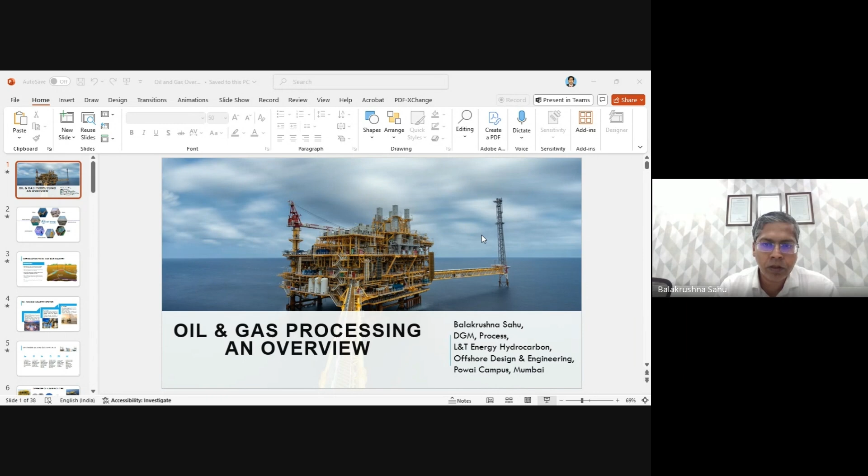Let me share the screen. If I share the entire screen, I will not be visible for any questions, but it is okay. At the end, the participants will ask questions. Is my screen visible? Yes, sir. As explained, I was an alumnus of IGIT Sarang from the 2006 batch. Sorry, sir, you can make it full screen. Yeah, I have done full screen. It's not visible, sir. It is visible, but not full screen. Click on F5 or slideshow. I have done the slideshow. It's visible, but not full screen. Let me share the complete entire screen. Is it visible now? No, sir. Some issue. I am clicking the slideshow. Visible now? Yes, sir, it's good, now it's full screen. You can proceed, sir.

Before going to the presentation, I will tell you where L&T Energy Hydrocarbon works in various aspects. I work in the offshore division. Apart from offshore, we have onshore. Offshore normally deals with making all the facilities inside the sea, in the waters where oil and gas is extracted, and whatever processing is possible is done in platforms located in the sea, then transported to the onshore via pipelines. We have another division called onshore, where after onshore processing, it goes to refineries and petrochemicals.

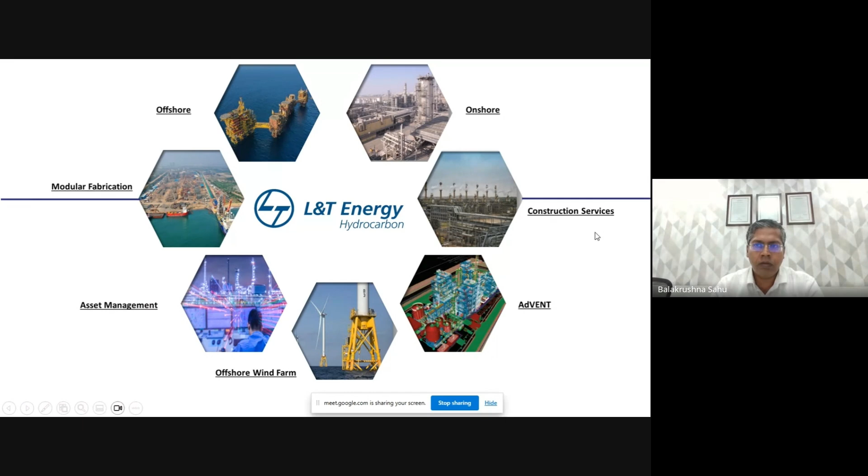Now we'll start the topic - what is oil and gas? Naturally, it is a fossil fuel. Whenever there is decomposition of marine life or fossils, they settle in the seabed. Over time they are buried under sediment and rock. Then there is an increase in pressure and temperature below the rock. Due to that, the organic materials break down, and in that process they form hydrocarbon - that is nothing but your crude oil and gas.

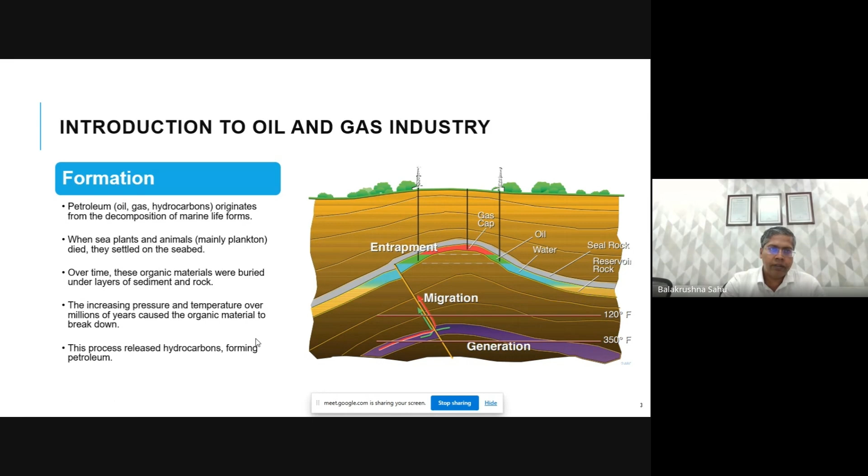So broadly, oil and gas has three sectors. One is upstream, which is exploration, either onshore or offshore, where production happens. Offshore means inside the sea. Onshore means like in Assam and other places in India where it is produced through drilling. So drilling and a little bit of processing happens in the upstream sector.

Then it is transported to the refineries, which is the midstream. There is a fine line between mid and downstream. Downstream, broadly, is the chemicals we produce from the petroleum, and midstream we can call petrol, diesel, and kerosene. So this is the broad categorization, and what I am working in, offshore oil and gas, is related to upstream.

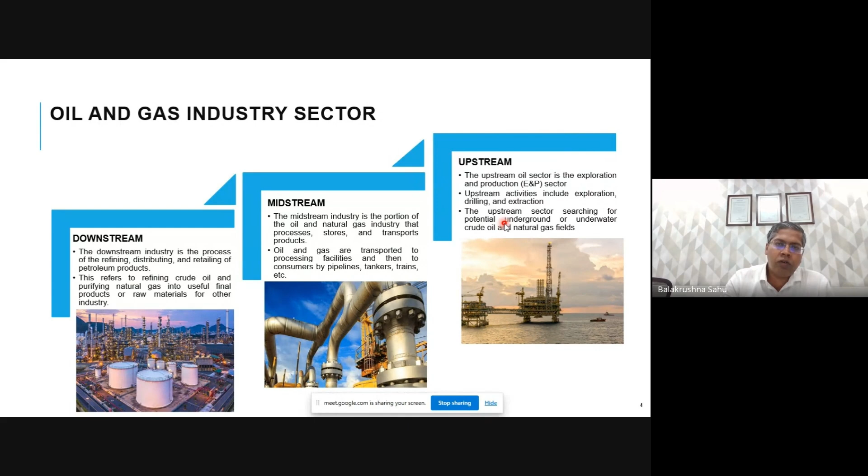So in the upstream oil and gas life cycle, there are 6 phases. First is licensing. Licensing is done every year by NELP and DGH, the Directorate General of Hydrocarbons. They license and give the contract for the fields.

Different bidders will bid. Currently in India, ONGC is the largest E&P player. Apart from that we have Reliance, and slowly Adani has also entered, and Sun Petro. So many small companies are also now entering into this area.

Then there is exploration. Once you get the field, you search for oil and gas, looking for the possibility of an oil and gas deposit, and try to locate it based on reservoir study. That phase is called exploration.

Then appraisal. Appraisal means, based on testing, you know how much gas and oil volume is there, and how much time it will take to produce - what is the life cycle. The maximum life cycle for projects we do is 25 years, so at least 10 to 15 years of life cycle should be there, otherwise there's no point investing a huge amount of money.

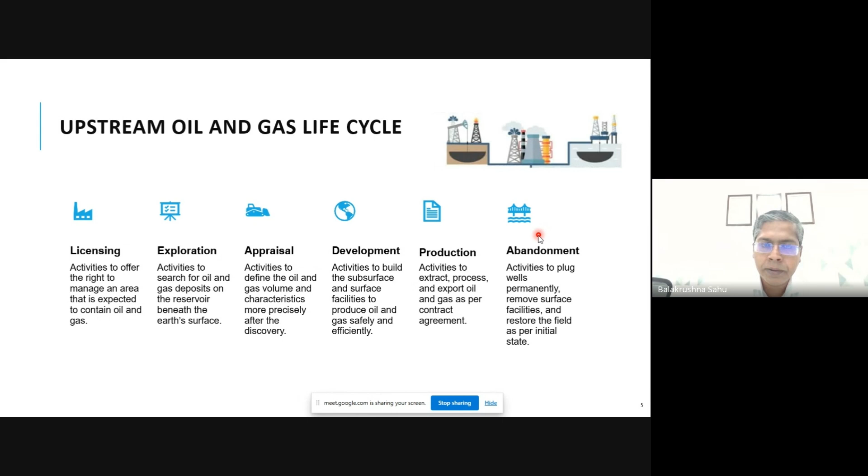So offshore oil and gas facilities - we call them platforms, like plants are known as platforms. We have a wellhead platform, which looks something like this. One platform will house around 10 to 20 wells, minimum around 8, maximum around 20.

So there will be 20 wells, and the risers - after production it will come, this is a collection from the well. This is a wellhead platform. There will not be any processing facilities there, only minimum facilities like a Christmas tree and others to gather it, and they will put a pipeline to transport it to the nearest process platform, or in some cases a riser platform.

These wellhead platforms, based on production, some are oil platforms, some are gas platforms, some are water injection platforms. Whenever the pressure is less in the reservoir, a few of these wellheads will inject water to increase the pressure, so that other wells will produce more.

So that's the wellhead. Then next is the riser. A riser platform is where many lines come from different wellheads and combine at the riser platform. The riser platform concept exists in the Middle East, but in India there are no riser platforms - all lines are different.

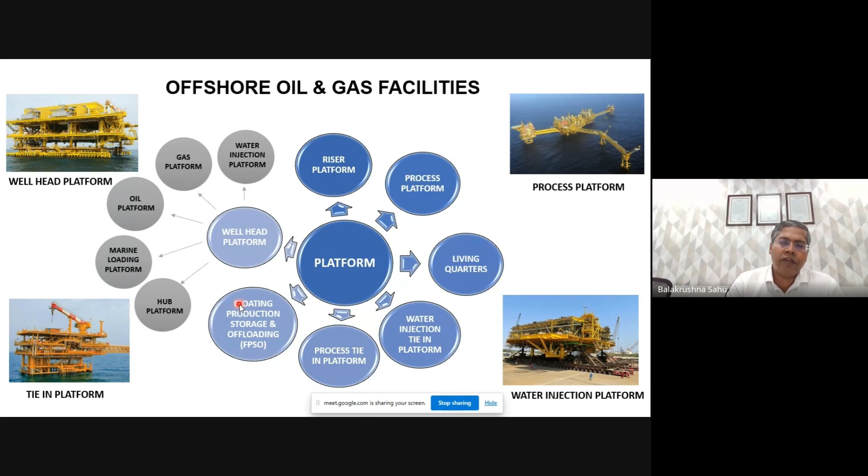Apart from this, there is something called floating production, storage and offloading (FPSO). All these platform concepts are applicable only in shallow waters. When there is deep water, 2 to 3 kilometers depth, you cannot create a platform with legs at that depth. In that case, it is a kind of ship. Once a ship is converted into a platform, it will float. That is called a floating platform.

As explained, there are different types. First, the fixed platform where there is a certain depth, which we call a jacket. This jacket can be as small as a tripod with 3 legs, up to bigger jackets with 10 legs. After that, this is the floating type - if it's the deepest, you cannot do anything else; you have to convert a ship and house the process facility there. The wellhead will be much below, and through there, high tension lines will come up. The flow lines will be floated and buoys will be connected.

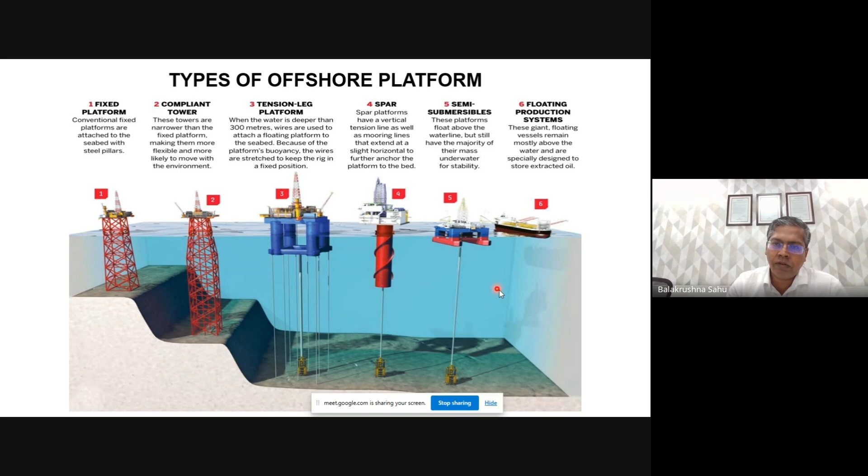At the wellhead, the main facilities available are the Christmas tree. A Christmas tree looks like this, a combination of multiple valves. The role of the Christmas tree: it will have a surface safety valve, a subsurface safety valve, and downstream of this, a choke valve. The surface safety valve is located above the water, and the subsurface safety valve is located on the seabed. Basically, if there is an emergency, these two emergency valves will be located, one at the surface level, one at the bottom level.

This picture shows the onshore version, but what I explained is offshore. Surface safety valve means it's located on the platform, and subsurface is at the seabed. The choke valve is downstream of the Christmas tree, which controls the flow. Let's say reservoir pressure is 500 bar, but we require to produce at only 20 bar - so the pressure reduction happens at the choke valve.

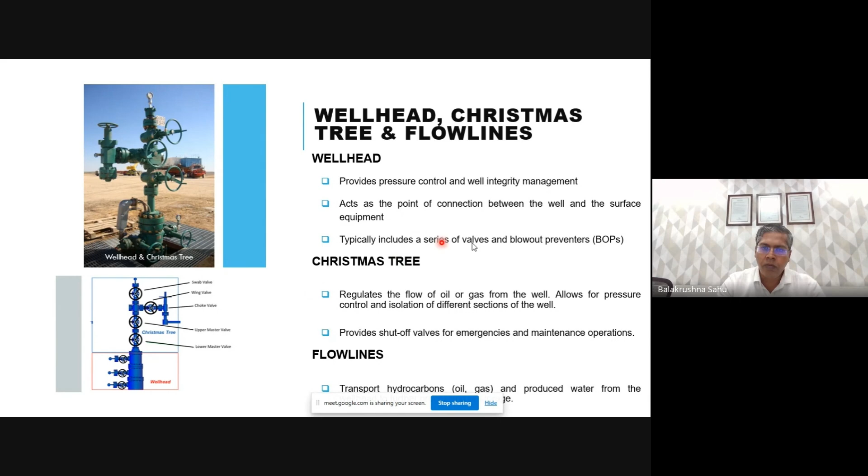In the P&ID, a wellhead platform will have an HCV, which is the choke valve, and an MOV, the motor operated valve. If there are 10 wells, 10 producer lines will come and form a production manifold, and that line will again go down and form a bigger pipeline to transport to the nearest tie-in platform or process platform. There, we also have a testing facility called either a multi-phase flow meter or test manifold, to actually test how much each well is producing, to know the health of each well - whether some well is saturated or some well is producing and not producing.

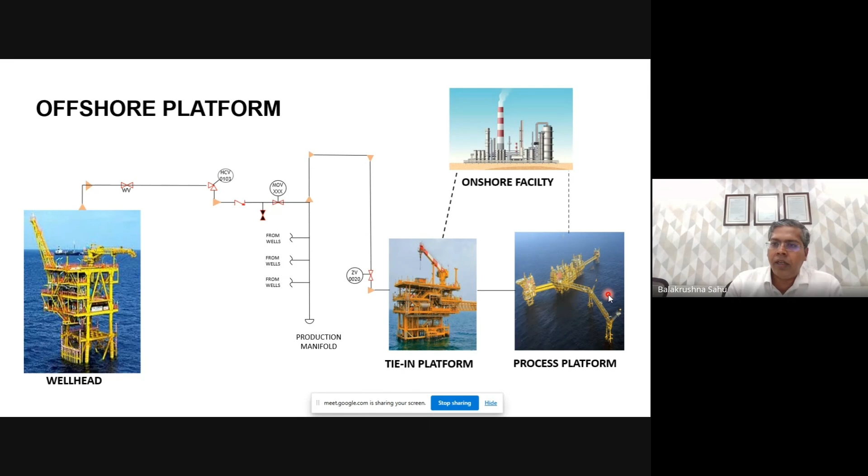Once it comes to the tie-in platform or process platform - what does process platform mean? This crude is basically oil plus water plus gas. The process platform segregates the oil and pumps it back to onshore through a different pipeline. The gas goes through gas processing units like gas dehydration, gas compression, then is pressurized and transported through a different pipeline. The water is processed so it will not be harmful to the sea environment, and once processed, it is dumped back into the sea. This is the work of the process platform.

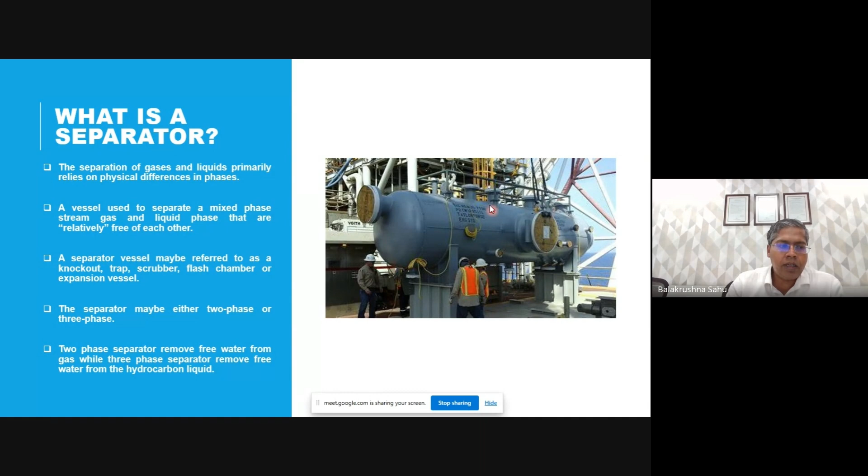This processing's first equipment is called separators. A separator is a vessel. There are primarily two types of separators: either two-phase or three-phase. Two-phase means liquid and gas separation, and three-phase means oil, water, and gas separation.

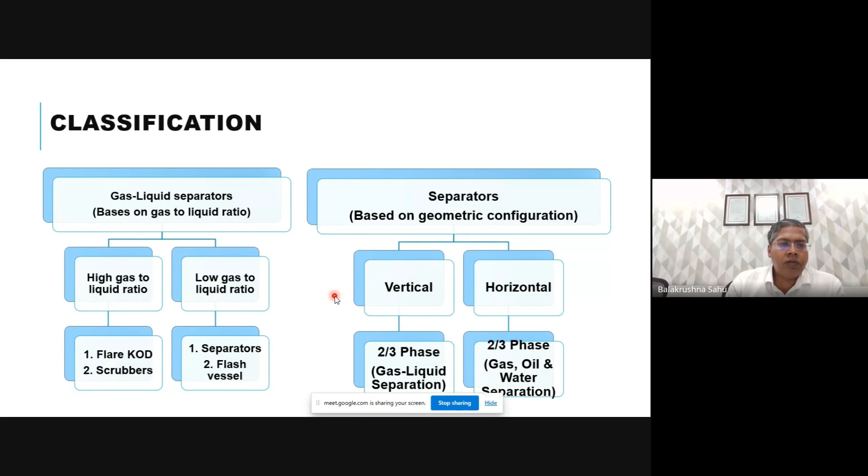We can give vertical or horizontal separators, and these are production separators. Sometimes when we are doing flaring or flashing the vessel, that application also uses a flare KOD, and similarly in the compressor suction we call it a scrubber. So these are also kinds of separators.

So what are the principles of separation? Separators work on various principles. Like momentum separation, where there are two different density fluids - the lighter will turn faster, and heavier will turn slower. By the momentum separation, you can separate the two phases, or you can use gravity.

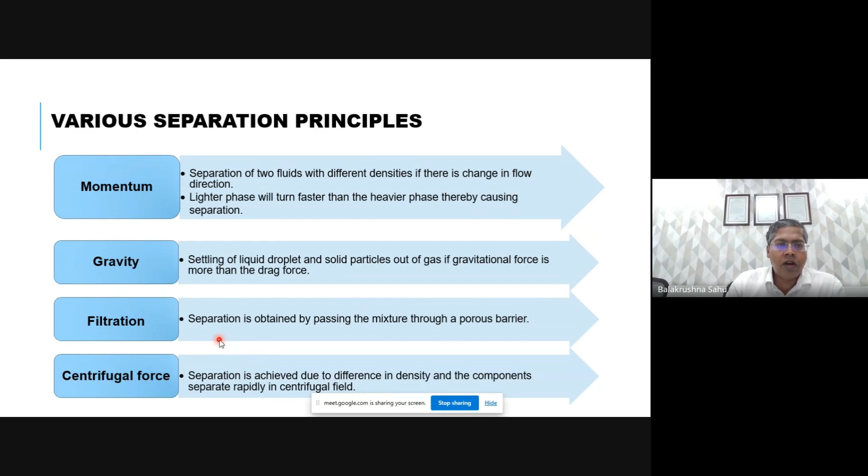You're given a residence time. Suppose this is a separator, you are flowing a fluid, inlet is here and outlet is this side. Coming from here to here by gravity, like oil and water, water being heavier, water will settle down in the bottom side. So the droplet separates by means of gravity. Sometimes gravity separation is not feasible when the densities of the liquids are very close, then we can use centrifugal force, or we can use filtration if there are solids also available.

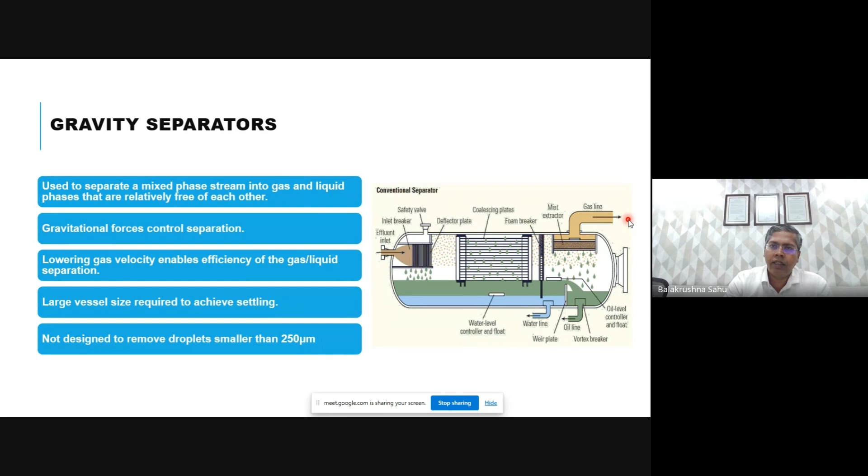So on the left side of the weir, because of gravity, water settles in the bottom and oil settles on top. The weir is designed such that it always overflows, so only oil goes to this chamber. So this chamber outlet gets oil, this chamber outlet gets water, and the top outlet gets the gas. That's how we separate oil and gas in these separators in the process platform.

Once separation is done, the gas will have saturated water content. If you do not remove that water while transporting to onshore, after a few years it will start corroding because of that water - they will form corrosion. So it is necessary to remove that water content which is saturated, by gas dehydration.

If the pressure from the well is not sufficient, and you require high pressure at the onshore, and you have to transport many kilometers of pipeline, then accordingly you calculate what the pressure requirement is, and we have to provide a gas compression system like compressors.

So once it comes to onshore, it will be sent to users like GAIL and other places, or maybe wherever you want, like any petrochemical plant, or for LNG application we can send it. Similarly, oil after a little bit of processing will be pumped to the refineries to further make petrol, diesel, lube oil, bitumen, etc.

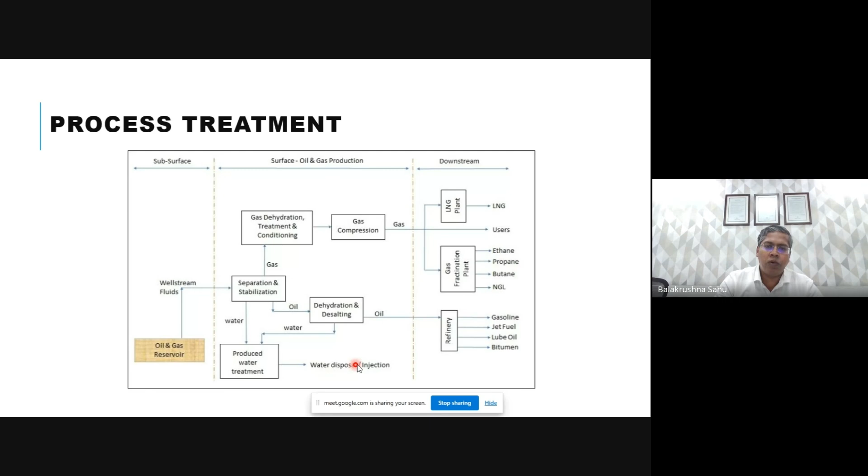And the water after treatment, once it is fit for the purpose and we receive the specification, then we can dispose of it in the sea. That is called produced water treatment.

Apart from this, we also have a system called gas sweetening. If the gas has H2S or CO2, it will become very highly corrosive. If H2S and CO2 are there along with water, they will form very highly corrosive compounds. So we need to remove the H2S, which can be removed by a package called the gas sweetening system.

Once it is absorbed, the liquid solvent will absorb the H2S and CO2, so then that liquid becomes acidic. Then that same liquid is filtered, flashed, and regenerated in the system, in the regenerator. So in the regenerator, it is heated by a reboiler so that whatever H2S and CO2 was absorbed, now they will dissolve out.

That H2S and CO2, it will go from the liquid stream, it will come out and they will flare it. Flare it means this: H2S they will burn in the flare, so it will form like SO2. So of course it will create SOx and NOx, but within the permissible limit. And if it is very high, then they can be further sent to a sulfur recovery unit to recover the sulfur.

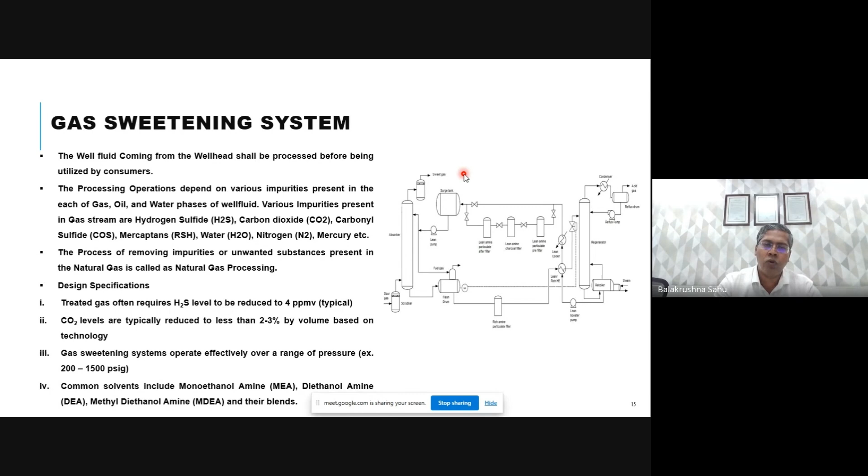So this is the way H2S and CO2 is removed from the gas. Now this is called sweet gas, because if H2S and CO2 is there, they are called sour gas. So after the removal of the sour component, it is called sweet gas, and then that can be sent to further water removal in the dehydration and compression systems.

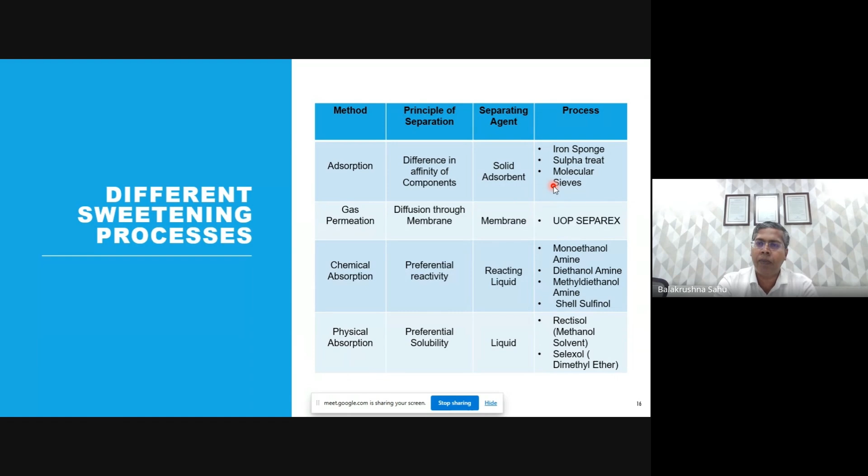So these are the different methods: adsorption, and absorption. The preferable method in the offshore industry is absorption technology. Also, some places use adsorption with molecular sieves, but that will need to be frequently replaced after some periodic time. This molecular sieves.

And second is the gas dehydration system. In India, the normal pipeline specification is 7 pounds per MMSCF of the gas. This much water is allowed, and it has been seen that if you do not maintain this quality, then there is an increase in the corrosion rate. So this is the guideline, and a few processes are available to reduce further below this.

To remove this, the solvent we use will be similar to the gas sweetening unit, but the solvent used will be triethylene glycol. We also have monoethylene glycol and diethylene glycol, but the highest efficiency is shown by TEG, and it performs better at higher operating pressure.

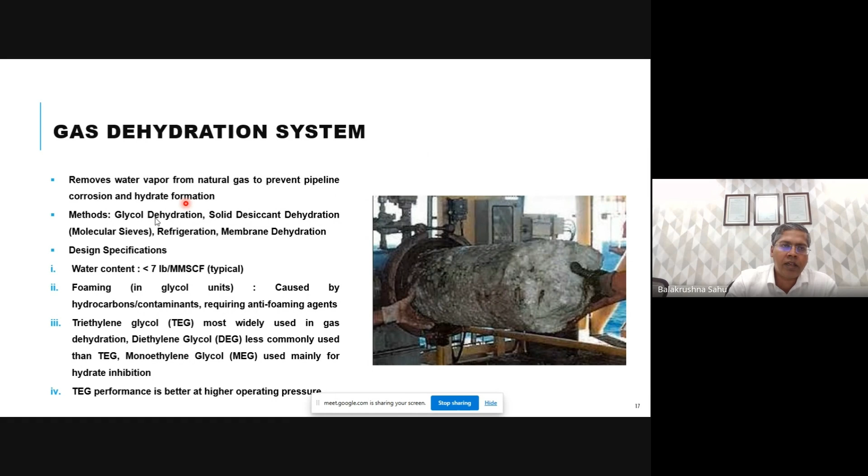Once the glycol absorbs water, it is called rich glycol. Rich glycol means glycol plus water, so the water content is very high. Then it will come to the regenerator. The regenerator has a combination of reflux condenser, still column, and reboiler.

So basically we are heating here to remove the water vapor. But the process is not so simple. If you heat at 200 degrees, much of the glycol will also go, so there will be a huge glycol loss, and that will increase your operational cost.

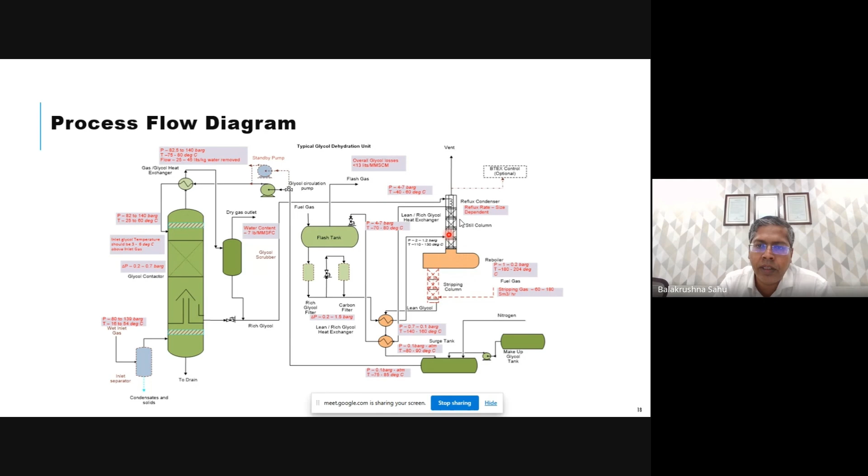So to remove that and recover this glycol, we have packings here in this column, also a still column. To improve the efficiency, we have another column at the bottom side, the stripping column. If we are not able to achieve 99.5%, we can use a separate stripping gas like dry fuel gas, so that will strip further 1 or 2% water which cannot be separated by normal heating. That is done by stripping. So this is the typical process of gas dehydration.

Next, gas compression. So why is a gas compressor normally required? If the required pressure needs to be sent through multi-kilometer pipelines and your inlet pressure is less, or you have a customer you have to deliver at a very high pressure onshore when you don't have that much pressure, considering the pressure loss in the pipeline, you have to provide a compressor at the offshore.

Compressors can be reciprocating, centrifugal, or rotary screw based on the applications, but typically centrifugal compressors are used when there is high flow rate and high pressure applications involved. So the compressor system will have one KOD and one compressor. The compressor will be coupled with a gas turbine.

Offshore, the majority are driven by gas turbines because along with the oil, gas is being produced. So the same gas will be used to power the turbine, and the turbine will run the compressor on the same shaft. Wherever power is available or gas is less, they can use motor driven compressors also. But for that, the requirement is that power should be available at the platform.

So this is like a single stage. Based on the pressure requirement, we go for 2 stage or 3 stage. So there's a suction KOD, then a compressor. Once you compress a gas, the outlet temperature increases, so you have to cool it again. So there's a cooler. Coolers are basically air coolers in India, but in the Middle East the ambient temperature is very high, so we use seawater coolers. If you use a seawater cooler, we have to provide a seawater pumping system separately. After that, it goes to the KOD. This completes one stage.

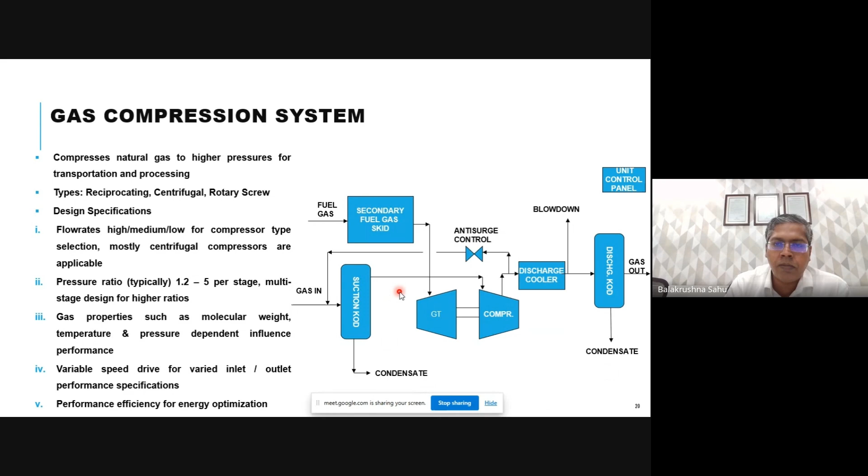Compressor working principle: the total mechanical energy is associated with gravitational potential energy and kinetic energy. All three remain constant - that is Bernoulli's principle. So if potential energy is kept constant, then if you reduce the kinetic energy, that will increase the pressure energy. So I need a high pressure. Keeping the potential energy constant, you have to reduce the kinetic energy, that is the velocity. If you reduce it, pressure energy will increase because the sum of all three is constant.

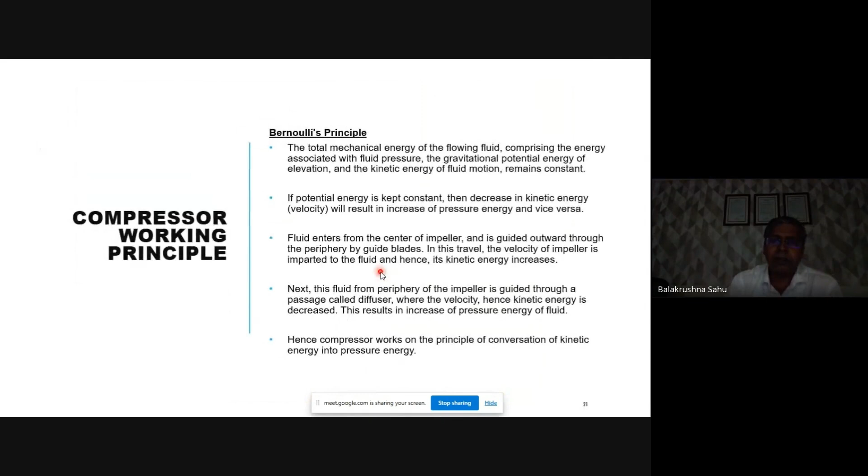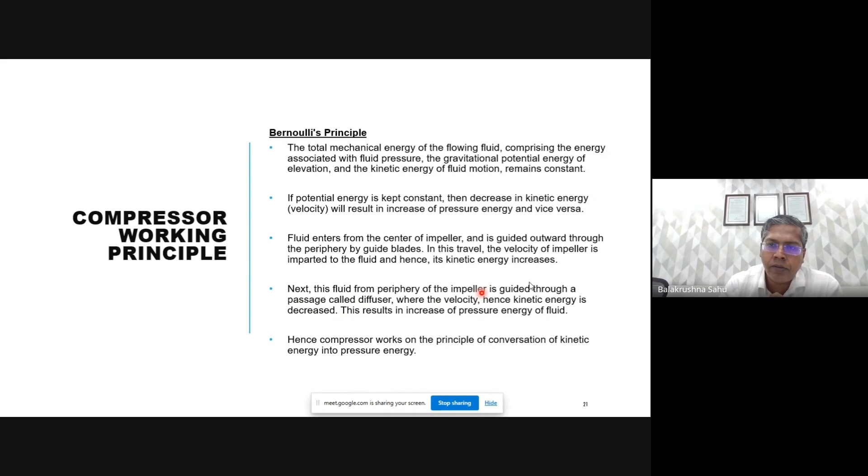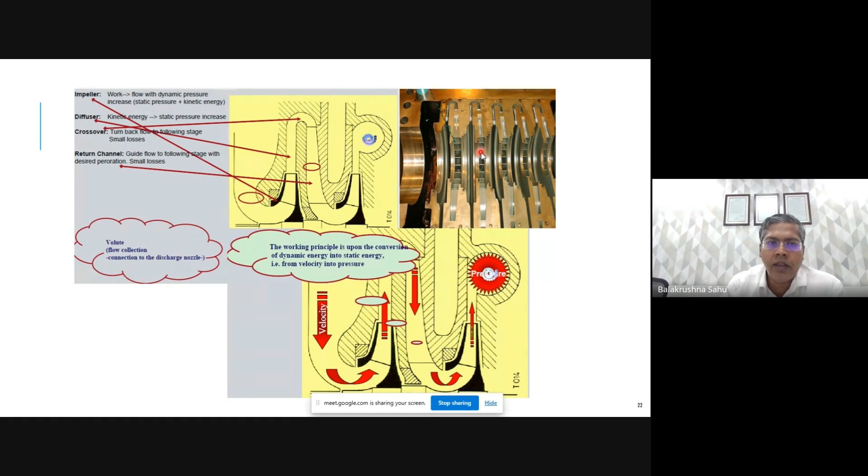Second step is called diffuser, where the velocity is decreased, causing reduction of kinetic energy. So this is the diffuser, this is the second stage, and the first stage is like this. So this is a simple concept for the compressor. Even though it is the most critical equipment, it works on the same principle, the fundamentals of Bernoulli's principle.

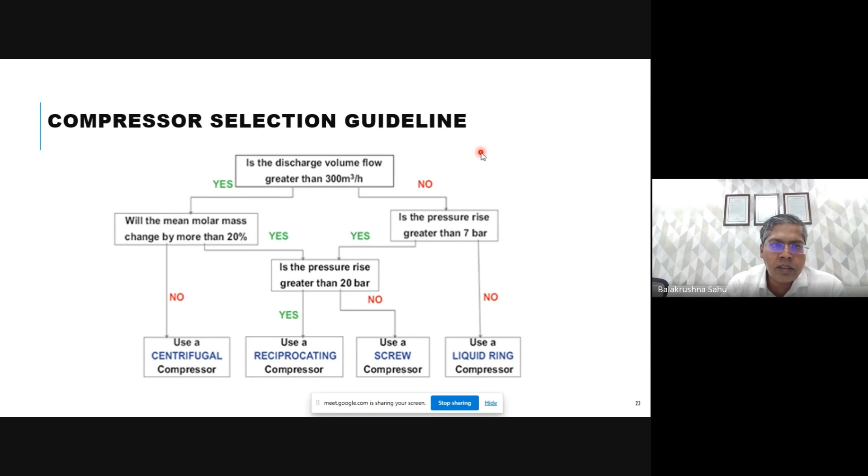So this is a thumb rule we normally follow for compressor selection guidelines. Whenever there is higher pressure with a higher flow rate, we use a centrifugal compressor. But if you require a high compression ratio with low flow, then reciprocating is okay. And if there's a small flow rate, then you can use a liquid ring compressor or even a screw compressor.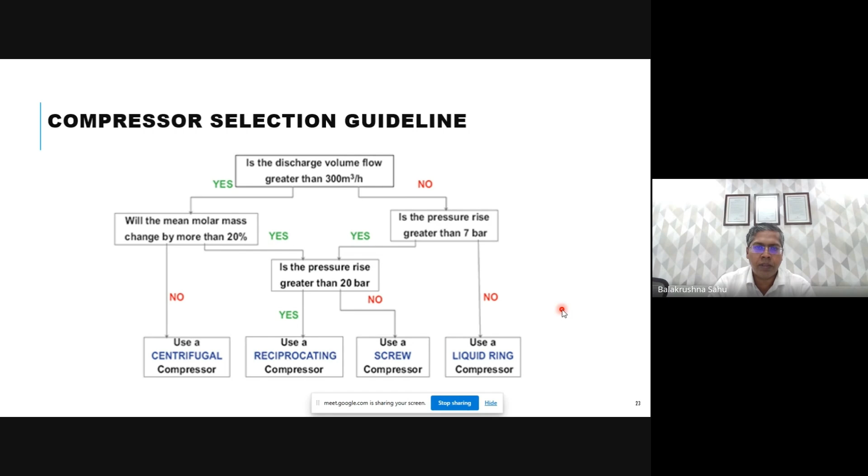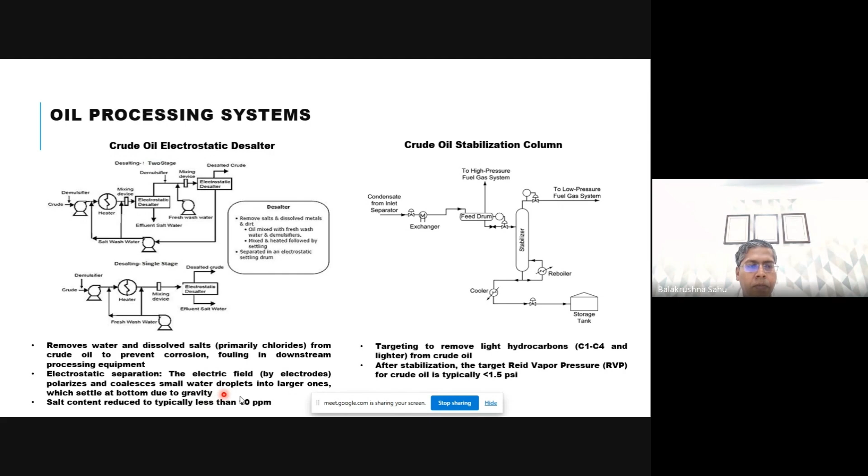Yeah, so that is about gas. Now oil - the most impurities of oil are like salt. Normally there are dissolved salts and BS&W, basic sediment and water. The salt content cannot be removed directly by separation, so for that we provide a desalter. Normally that is a kind of electrostatic desalter where you give an electric field, which will polarize and coalesce the small droplets into larger ones that settle at the bottom by gravity. So the salt content is normally reduced to 10 ppm.

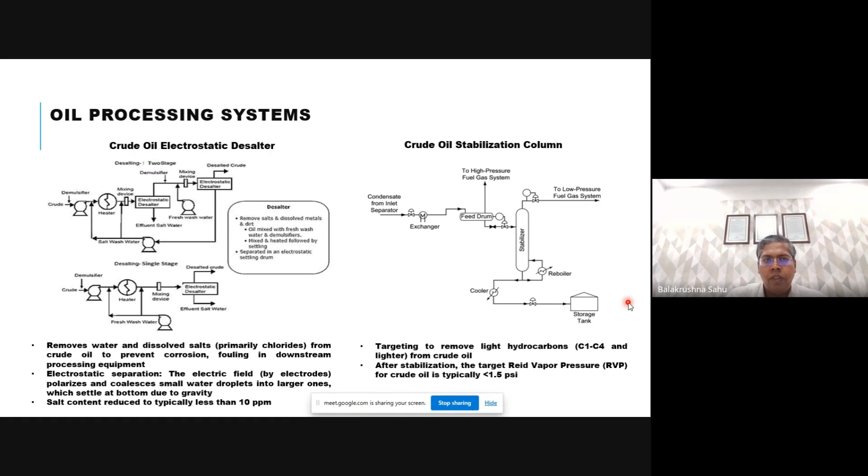Why is it required? Because when producing oil, there are certain quality requirements - typically we have to maintain a Reid vapor pressure, and based on this quality, there are costs involved. If you give a lower quality product, the cost will be less. So that is based on customer requirements. So either you can use an electrostatic desalter, or sometimes only a crude stabilization column - just stabilize for some hours, then remove the lighters. Then we have butane, propane. So normally butane plus is good enough. So these are the two ways we do oil processing.

Then the third one is called water processing. For water processing, we use hydrocyclones, the cyclonic movement - that's the first step. Then secondary treatment is degassing, by flotation method, induced gas flotation, or dissolved gas flotation. Then tertiary treatment may be by additional filtration. So after separation from the separator, normally there will be around 1000 ppm of water, 1000 ppm of oil in the water.

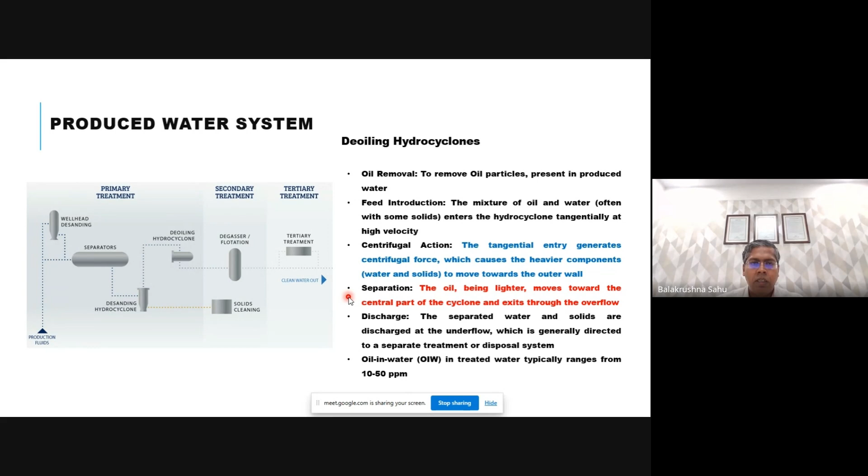But it is not safe for the marine environment to dispose of that amount of oil into the sea. So we provide this produced water system for this purpose. First, if you give only de-oiling hydrocyclones, it can reduce up to 50 ppm. The acceptable level in India now is you have to reduce up to 25 ppm before sending or disposing into the sea. So we have to provide an additional unit called the degassing unit.

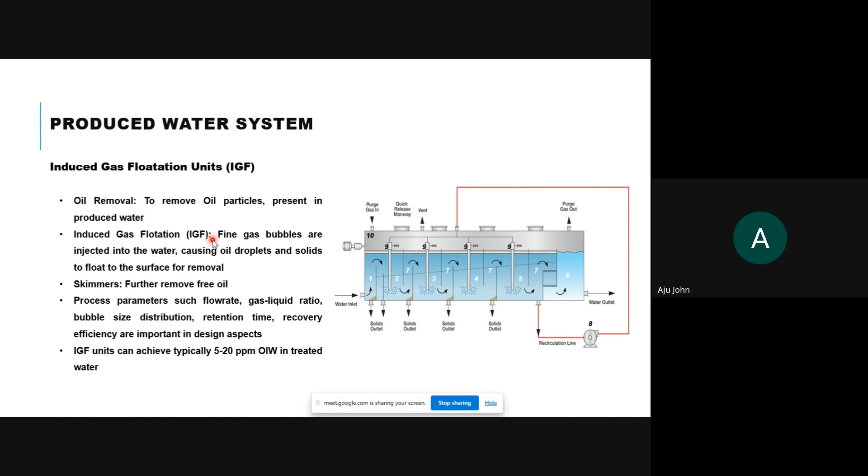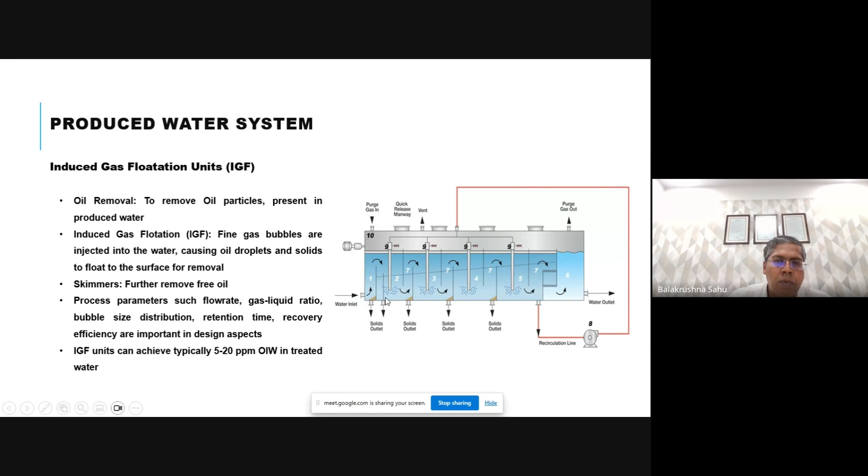In an induced gas flotation system, we induce the purge gas, which is nothing but a fuel gas. It bubbles and forms bubbles, and the bubble will coalesce the oil droplets so the oil comes to the top and is skimmed off from the water since the oil quantity is very less. So you are channelizing the oil by purging the gas, and this way we can reduce it up to 20 ppm.

Since oil and gas production happens from the seabed, naturally sand will come along. If heavy sands are coming, we have to give a desander package where the sand slurry from the separator comes, and we give separate clean water, and they have a cyclonic action. They mix this slurry with the clean water in a cyclonic action where the oil is recovered from the top, and the sand-water slurry is recovered from the bottom and disposed.

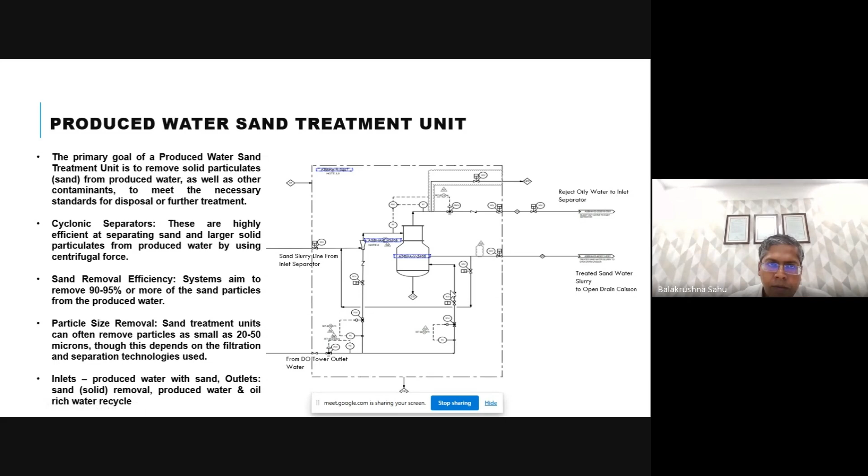So the next aspect is LNG, that is liquefied natural gas. What is LNG and why is it important? LNG is a natural gas that has been cooled and condensed into a liquid.

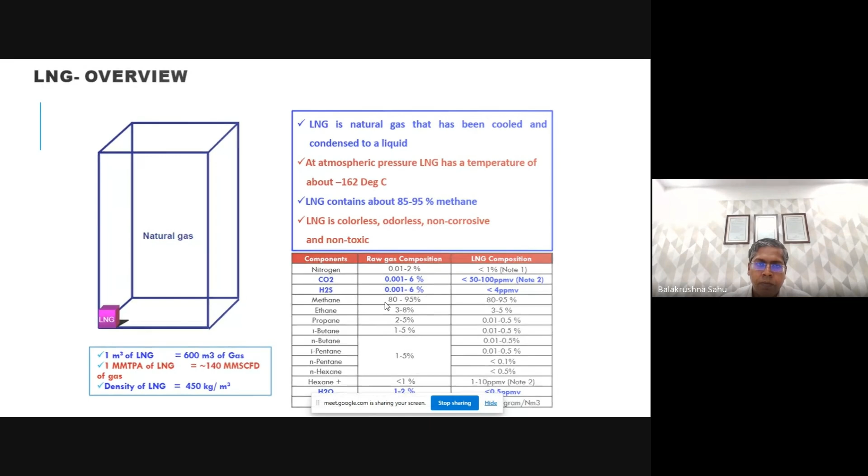So in LNG, there's exploration and production, then onshore we liquefy it and put it into spherical vessels on the ship. Once it comes into the LNG terminal, that liquid is gasified in regasification and transported through pipelines to the consumers.

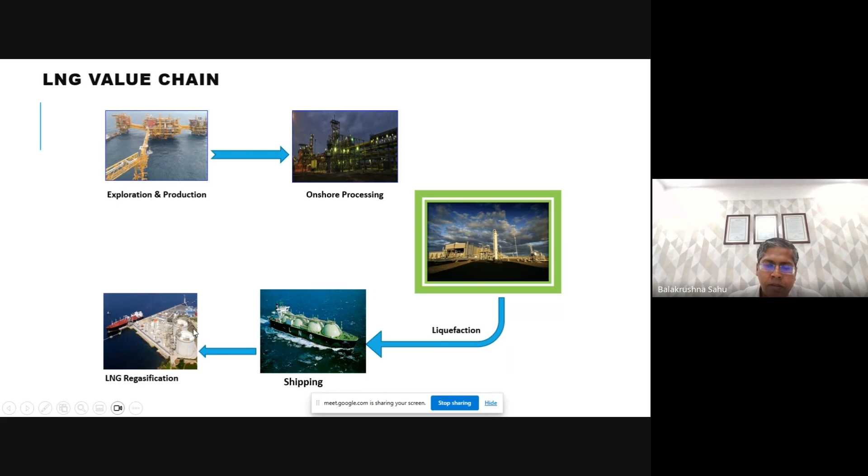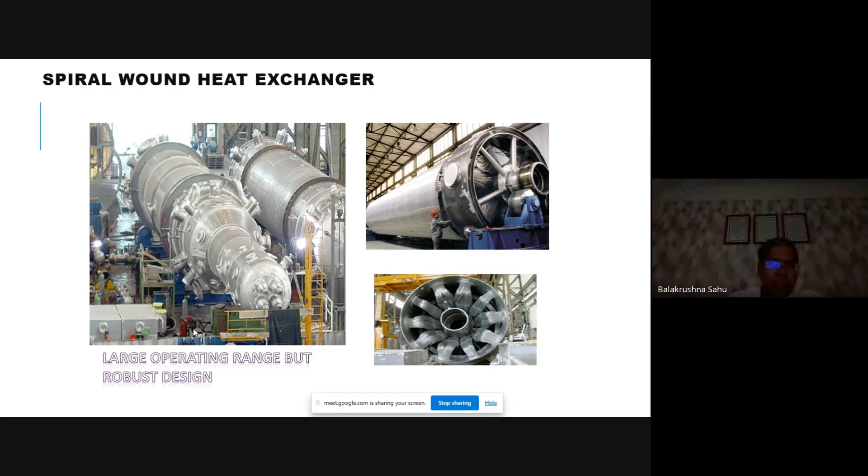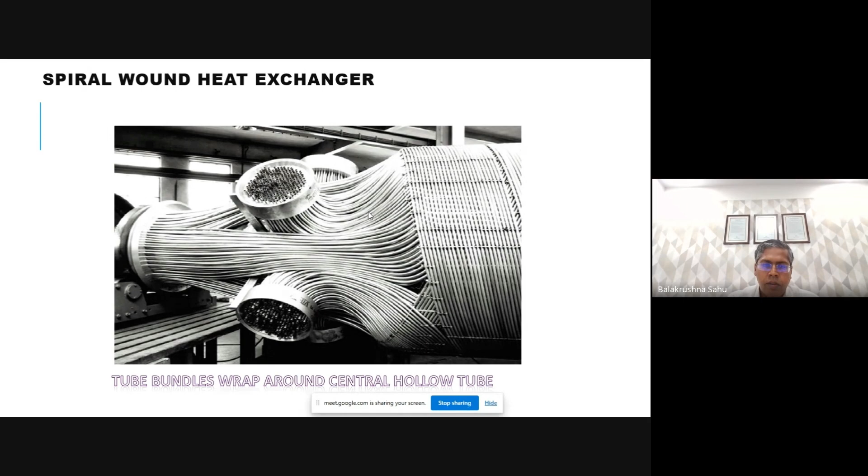These are the various technologies available for LNG liquefaction. I have taken a few pictures showing how very large, gigantic heat exchangers are used in LNG, like spiral wound heat exchangers. The tube bundles—there are thousands of tube bundles used, crisscrossed, wrapped one above another to get better surface area within a compact space. This kind of technology is used in LNG.

The last aspect of oil and gas processing is chemical injection. Every wellhead platform or process platform has a chemical injection system. Even though we take care of water content and everything, there are some upset cases where there might be chances of corrosion. To prevent that, in the oil stream we use oil corrosion inhibitors, OCI, and in the gas stream, GCI. So different chemicals are used like this.

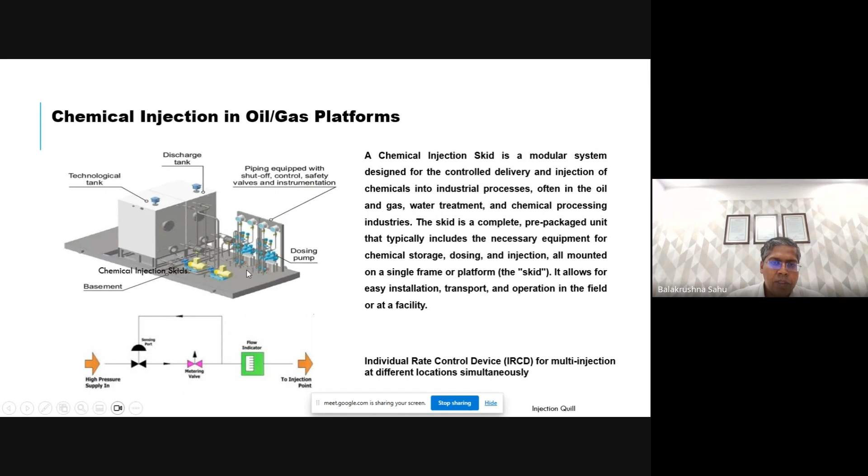Chemicals are stored based on requirement from lab analysis so we know how much to inject. There's a system with dosing pumps that dose into the pipeline. Different chemicals are injected, like corrosion inhibitor to prevent corrosion—GCI and OCI. Scale inhibitor is injected when scales form in the pipeline. If there is oil-water emulsion, we need to break that emulsion, otherwise separation is not feasible in the production separator, so before the production separator you have to put emulsion breakers.

If there is microbial growth, we have to provide biocides. Similarly, for hydrate inhibition—hydrate formation happens when water content enters and forms ice, choking the pipelines. To prevent that, if you cannot control the process parameters like pressure or temperature reduction, the only way is to inject chemicals upstream before the pressure reduction, so that even though pressure and temperature drop below the hydrate formation point, it will not form hydrate because you are altering its molecule.

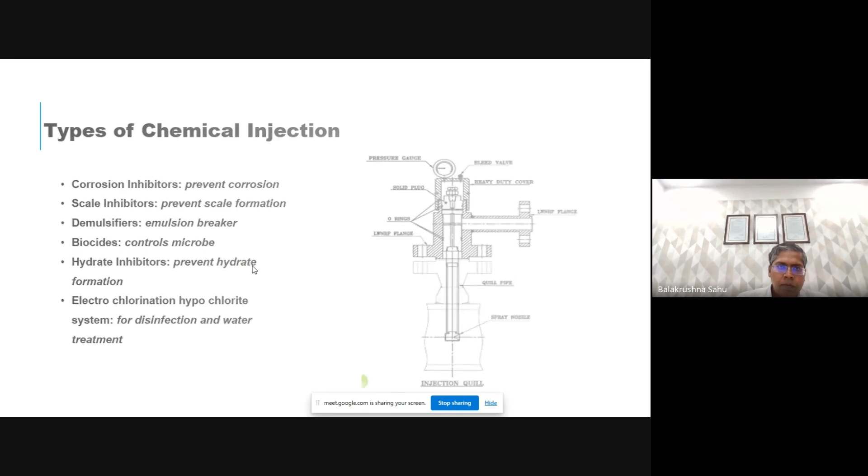So, there are the utilities.

Apart from this, there are some utilities available. As I told, the living quarters, people will be staying offshore, so you have to have a potable water system where you have to have a potable water maker, then pump. Everything will be there, because there will be rooms, kitchen, toilets everywhere. So you require potable water, like you require hot water for the galley and the showers.

Fire water is definitely required because it is an offshore system. If there is any fire, automatic sprinklers have to be fire compliant, so automatic sprinklers are available throughout the platform, along with the living quarters also. Apart from that, there are fire hose reel stations where operators can use to do the firefighting.

Similarly, the other utilities like instrument or utility air, because all valves we are using are actuated valves, automatic on-off control, so that requires air as a medium. Whenever there is no power in the platform, like some system upset and everything becomes trip and the plant shuts down, then we have an emergency diesel generator where using diesel you get the power and make the system ready and restart.

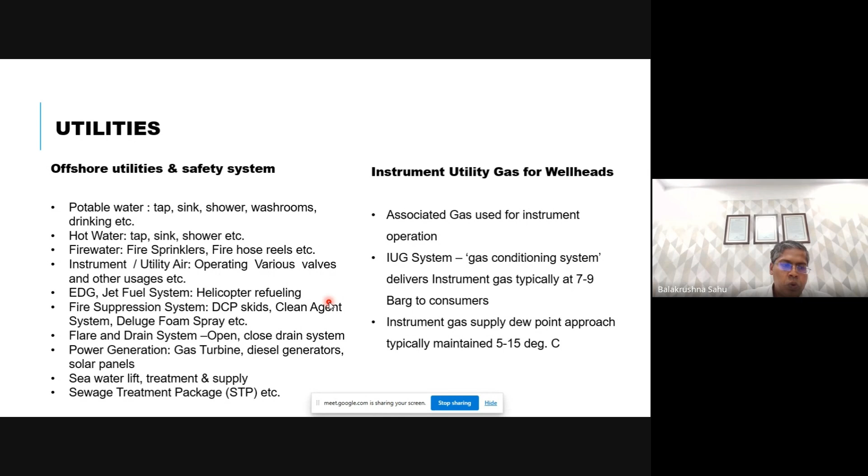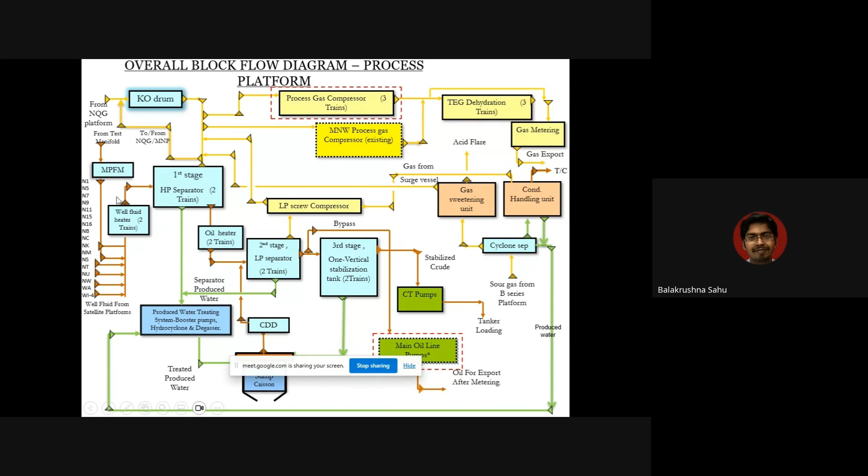Then it was going to the first stage separator. The arrow it is moving, that is the oil stream. So once the separator oil is separated, then that oil was going to the LP separator, because all gas cannot be separated in one stage.

After we are reducing, we are getting this oil from the HP separator, we are heating it a little bit, so that some condensate forms, like some gases are forming, so that we are sending out. And this oil we're sending to a third stage, like what I explained, because we need to stabilize it to meet the customer requirements, whatever is the product quality requirement.

Once it is stabilized, it was sent through the pump. There were two modes of pumps - the main oil pump, which was sending it through the pipelines.

Wherever the CT pumps are there, whenever there is a tanker, sometimes directly - this project was for ONGC when they directly sell, so some ships are coming directly to offshore. So there is another provision, the crude CT pumps. So there were two systems.

So once this oil system is there, then now gas. The HP separator - what gases are separated from other platforms, some gases are coming. So these two, and the very low pressure gas, where it is going, that is again compressed at the LP screw compressor. So all three combined.

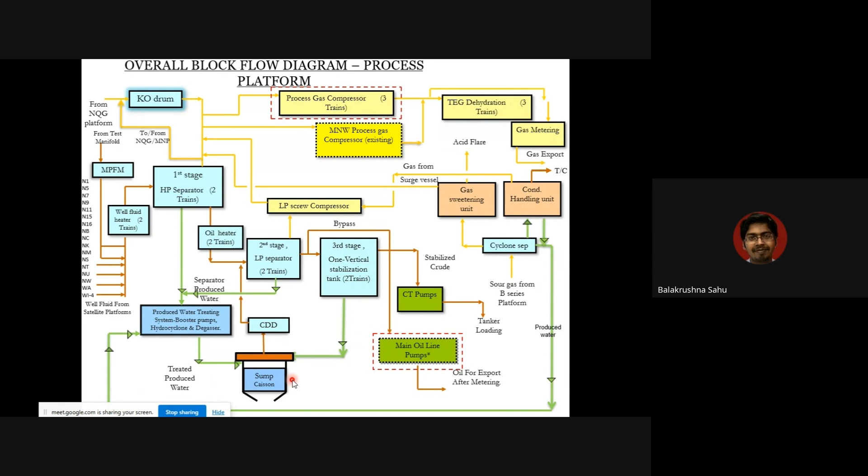Similarly, the waters from HP separator, LP separator, stabilization vessel, and condensate handling are all treated in the produced water system and sent to the sump caisson. The sump caisson is the final means of disposal into the sea. This is located at the jacket level, the bottommost level of the platform, where the treated water is disposed, having a specification requirement of 25 ppm of oil in water.

So those were the processing systems of a typical process platform.

These are the utilities. Utility means we have a fuel gas skid. Fuel gas is a utility, so there were around 5 fuel gas skids - the one marked P is for primary, and others are secondary. For each compressor unit, there is a dedicated fuel gas skid.

Then we had a hot oil system, used for heat recovery. It was a kind of green initiative - when the turbines run, high temperature flue gases are emitted into the environment at around 500 degrees Celsius. If there is a heat requirement anywhere, you can recover that heat, reducing it from 500 to 200 or 250 degrees, so that balance heat is recovered through the hot oil system. The hot oil takes heat from the flue gas, and the hot oil temperature increases to 260 degrees Celsius.

That heated hot oil is used in the regenerators, where around 200 degrees is maintained in the GDU and GSU places to regenerate the liquids, stripping off the water content and H2S, CO2, whatever they have absorbed. So that heat is recovered from the turbine outlet using the hot oil system - that's the hot oil circuit.

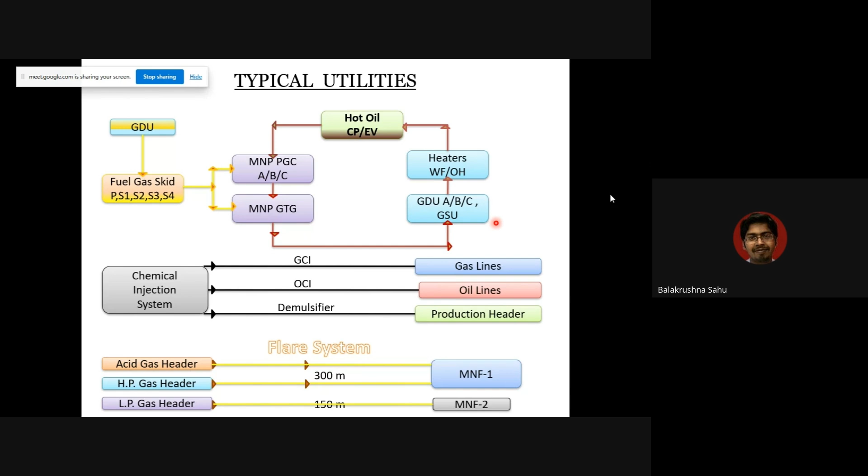Apart from that, there was an LQ, a 150-man living quarter. In the living quarter, like I mentioned, we have a crane and an emergency diesel system, so we have to have diesel storage. Diesel was used in the deck cranes, also for operation of the fire water pump and emergency diesel generation purposes.

Similarly the water maker - since 150 persons were staying, they need drinking water, potable water. Normally we provide two types: vapor compression type or reverse osmosis type water maker. They use sea water and convert it into potable water for drinking purposes.

And for the utility air, we take air from the atmosphere and convert it into utility air using an air compressor to compress it.

Then we put a dryer and reduce the temperature, the dew point up to -40, so that all the moisture is removed from the air. That air is called instrument air, which is supplied into all the instruments. It is also given as input to the nitrogen generator, where using this instrument air they prepare 99% pure nitrogen. That nitrogen is used for purging and blanketing purposes.